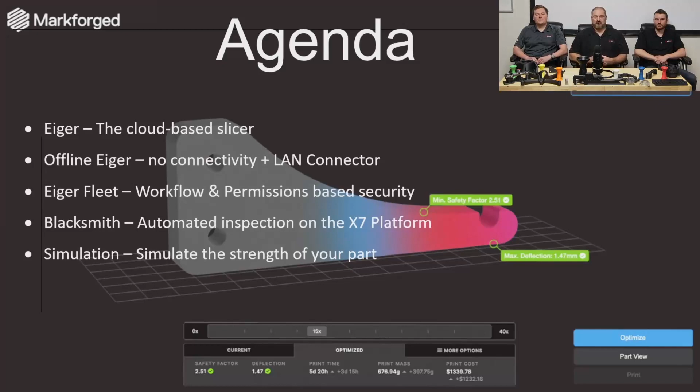Real quick, what we're going to cover today is the Markforged software lineup. The first thing we're going to talk about is Eiger, what we call Eiger Core. This is the cloud-based slicer, it comes free with every Markforged printer. We're going to talk about some benefits of that. Then we have a version of that which is offline Eiger, we'll discuss the pros and cons to that. And then Eiger Fleet, a pretty powerful suite of slicer software. Then Blacksmith, automated inspection on our industrial X7 platform. And finally, we'll wrap up with simulation. Joe recently did a webinar on simulation that goes very in depth, so reach out to us after you see what we have to say today if you wanted to see that webinar more in depth, we're happy to point you in the right direction.

So with that said, I'm gonna have Joe start out with Eiger here.

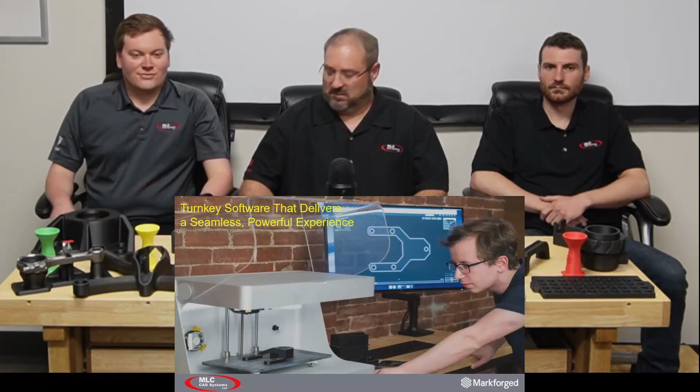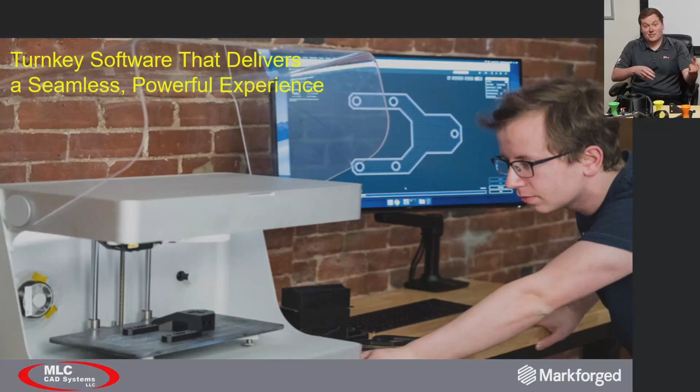Thanks, Kyle. So Eiger, basically at its core, it's a slicer. What it's doing is taking your STL file and slicing it into layers, so that it can be read by the printer. Really, Eiger is a turnkey, seamless experience to use. Like I mentioned, it's a slicer at its core.

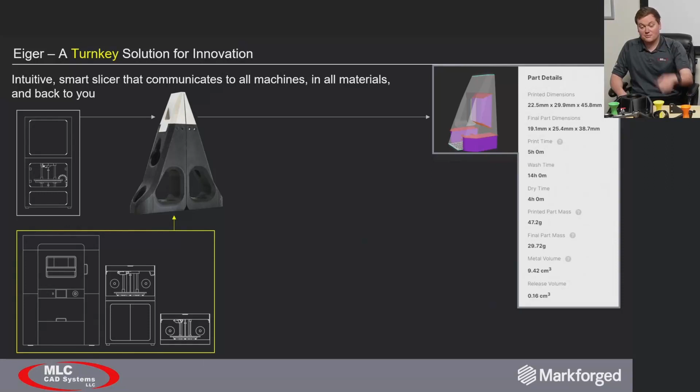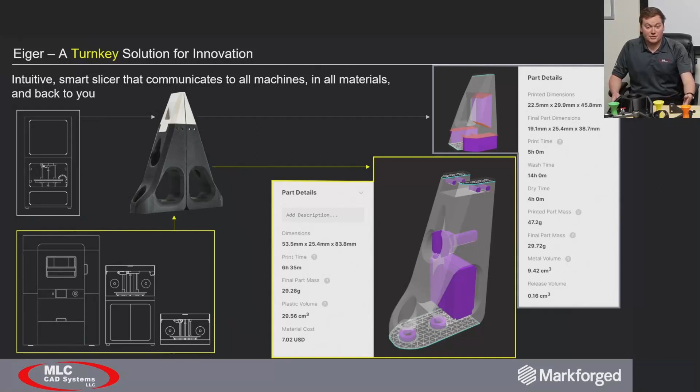What it's doing is communicating between all the different printers and all the different materials that Markforged has to offer. Here you can see this robot end effector, a hybrid part, so we've got some metal tips on it, and then we've got the onyx material, a composite material. So we're communicating between these different materials and the different printers, and it's feeding this information back to you. Here you can see the metal tip, it's telling you how long it's going to take to print, how long it's going to take to wash, how much material it's going to use, and what that cost is going to look like. A similar type pattern there with the composite material. So it's very automated, communicating all that stuff to Eiger and back to you.

So I mentioned about it being turnkey, the ease of use. Let's look at a comparison between Eiger and say a hobbyist slicer. One of the great hobbyist slicers out there is Prusa slicer. Now what I'd like to draw your attention to is the difference between all the different settings that you have on Prusa slicer versus Eiger. What I like to think about is think of it like a car. So car manufacturers give you access to the steering wheel, the throttle, the brake, to operate the vehicle. They give you all of the right things.

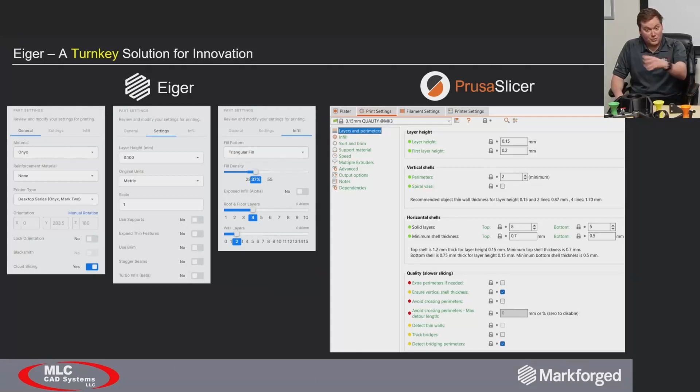They don't want to give you too much, because then you start screwing stuff up. It's a very similar idea with Eiger. Markforged is giving you the right settings, that's all you need. Eiger did the research for you. They figured out what settings are going to give you the best print time, optimized print time, optimized for strength, optimized for part quality. Because of that, it's easy to use, and it doesn't take anyone with a lot of experience. With Prusa slicer, you've got too many settings, tons of settings, and it takes a lot of experience to know what works.

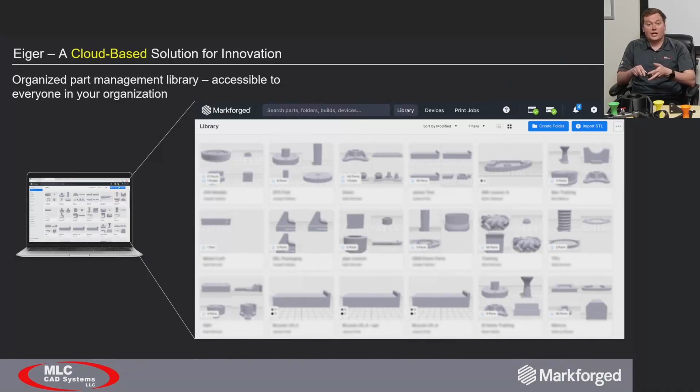Now, it is a slicer at its core, but it's also more than that. Eiger is a cloud-based solution. So what this looks like is all the people in your organization who have access to Eiger, they can load in their parts, they can organize their parts into folders, and you have access to all these parts and all these folders and all your printers in your organization. So I'm out of Atlanta, and I can send a print job to these guys here in Dallas, or I can send it to our customers, or rather our other offices out in like Tempe, Arizona, for instance.

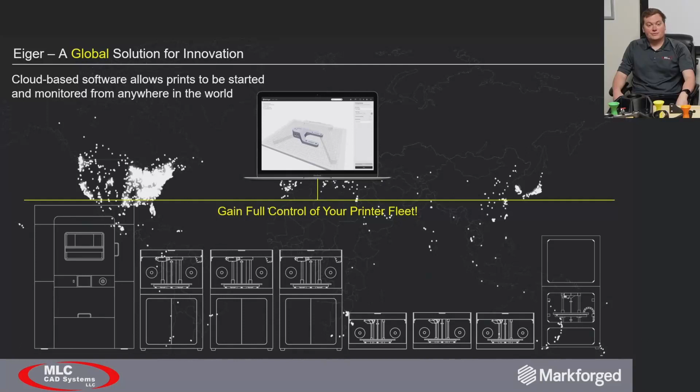And it's automated, right? It's an automated solution. And so what this looks like is take your printer maintenance.

All the printer maintenance is tracked in Eiger, and it's communicated to your printer. So you don't have to reach out to your reseller and say, hey, I've been printing X amount of hours on my printer, I've been running X amount of material through it. When do I change my nozzle? How do I know when these preventative maintenance items need to be tended to?

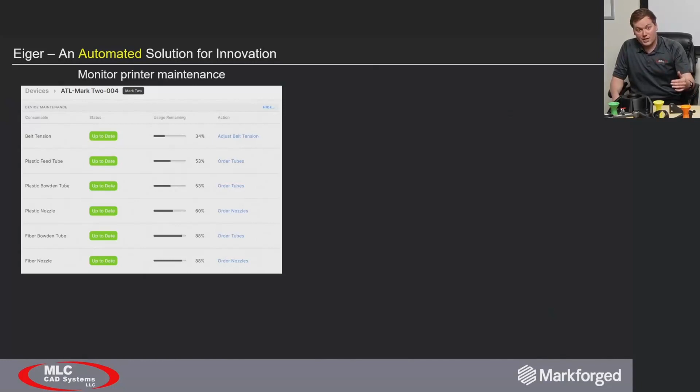Eiger is tracking all this information and it's fed back to you directly. There's no guesswork involved. Similar with updates, right?

When Markforged releases a firmware update or a software update for Eiger itself, that information is readily communicated to you. The software updates happen automatically. Usually when you log into Eiger, you already see, hey, we fixed some bugs there. And then the firmware updates just show up on that little blue bar on the bottom of your printer's user interface, and you just update accordingly.

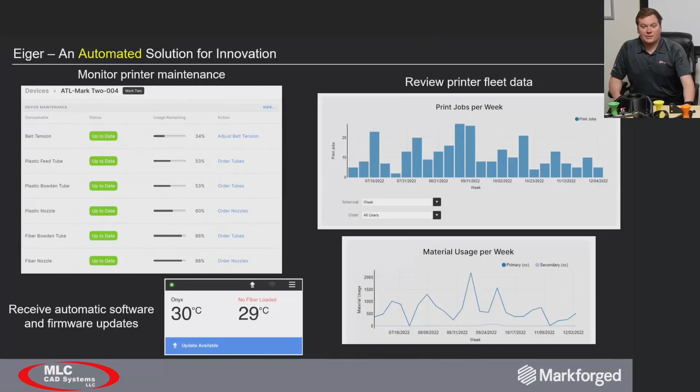And for those who need to see how much material is being run through the printer, who's running the most print jobs, what jobs, what parts specifically are being run the most, there's analytics available in Eiger that summarize all that information.

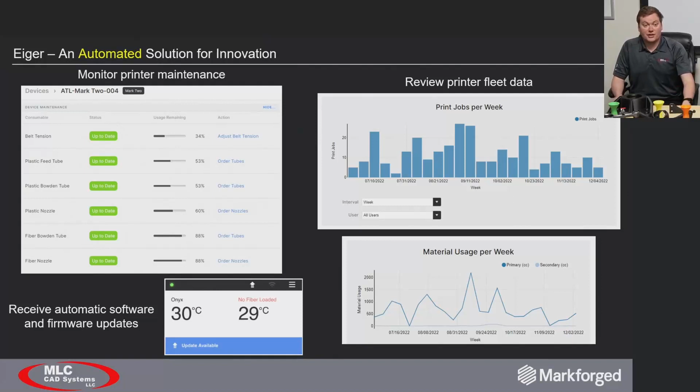Now we have some customers that sometimes hear cloud-based and get a little cold feet. Well, Eiger is the first cloud-based slicer to be ISO 27001 certified. So what that means is that all your part and user data are encrypted, both in transit and at rest. They use the Amazon Web Service Cloud, and ISO 27001.

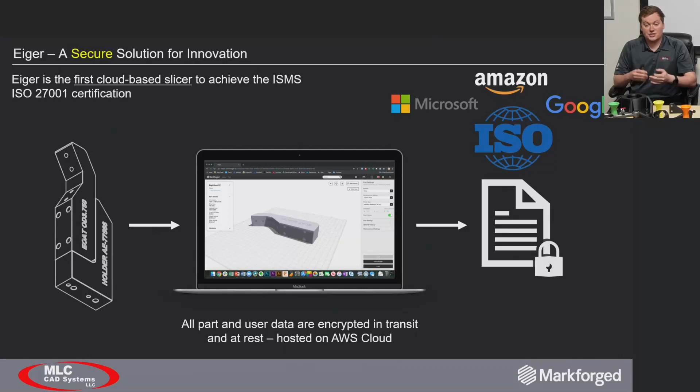Some people may not be familiar with that. That's an ISMS certification, and big Fortune 500 companies like Microsoft, Amazon, and Google have this certification. By doing so, you know that your credit card information and your communications that run through there are all safe and encrypted. Eiger is the same way.

Hey Joe, it looks like there's a couple questions.

The first question: is it the same slicer that we use for all of our machines? Yeah, as I had mentioned, Eiger communicates with all the different printers. So if you have a Metal X printer, you're going to use Eiger. If you have an FX20, or an industrial, or a desktop, all these different printers are going to use Eiger. And all the material profiles are already in there. So if Markforged were to release a new material, you wouldn't have to go in and program anything or put the material in yourself.

So you're telling me if I'm printing in composite or metal, it's the same interface either way? That's correct. Oh man, that's great. Yeah, very easy to use. So it looks like there's another question here.

So it's cloud-based. So what happens if we lose internet connection? What if I'm printing? What if I'm trying to slice? How does all that work?

Yeah, it's a great question. We get that sometimes, customers reaching out asking about that sort of stuff. Well, I can assure you that even though Eiger is cloud-based, when you go to send that job to the printer, that print job downloads straight to the printer. So while it's printing, even if you lose internet, you're not going to have a print failure or anything.

Oh man, that's awesome. Well, I think that brings us to our next subject that we want to talk about. So when we're talking about offline, Bryce, tell us a little bit about offline Eiger, why don't you?

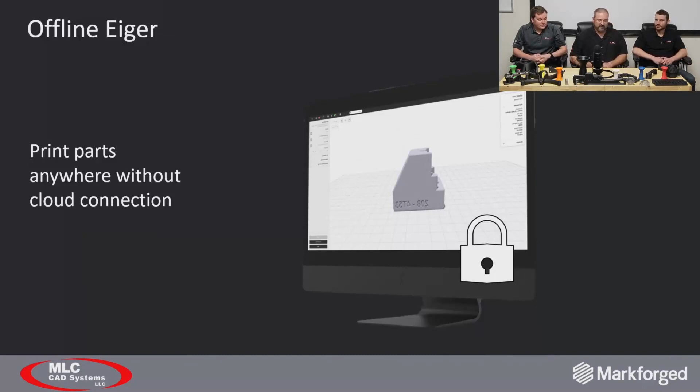Yeah, so let's get into it with offline. Offline is great for those customers that, for military for example, if you're going to be out in the field, you don't always have an internet connection available, and you may still need to print some parts. And so that's where offline Eiger comes in, or for specific companies that need that extra layer of security.

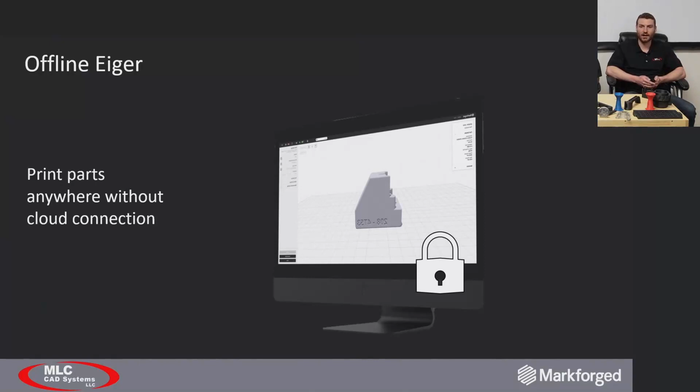So Eiger takes everything 100% offline. You have your printed parts, your files, and everything stored on your local computer or your local network, and it's all safe and secure there. Your parts are also, once they're sliced, locked to the specific serial number of your printer. So if you put that sliced file on a USB stick, you can only print that on your specific Markforged printer. So nobody else can take your files and run away with them and print them on their machine or anything crazy like that.

The other really nice thing you get with offline is you get quarterly firmware and software updates. So your slicer, Eiger, is always running the latest and greatest, and so is the printer. Sometimes you'll get updates that make it a little faster, improve the quality a bit more, so they're always keeping you up to date there.

The other awesome thing you get out of offline Eiger is a LAN connector. You can use this to jump into your local area network and get connected through everything, and you can still monitor your print status, receive telemetry, and send your prints to the queue and walk over and print them. So you can either send it through this LAN connection, or put it on a USB stick, take it over, and print it from the machine directly.

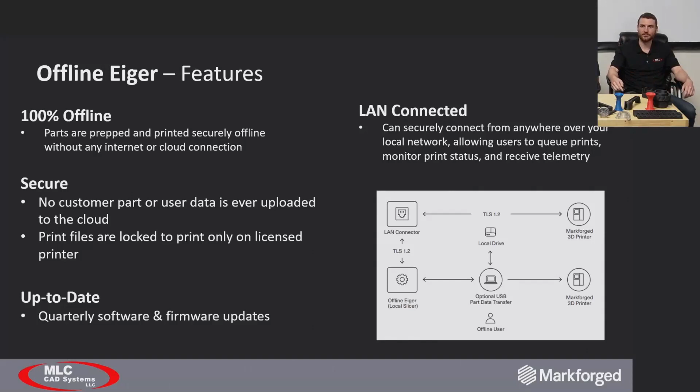Oh, that's great. So, question for you, Bryce. If you know you have offline Eiger, how many users can you have? Are there any limits to that based on the printer you have? Yeah, that's a great question. So with offline, when you get your device, you get unlimited downloads for that specific device, and as many people as they want can run through it.

And speaking of users, there's some really cool user control with Eiger that you can use in Eiger Fleet. Hey, that's me. It sure is. The Eiger Fleet is probably one of the more advanced slicers in our fleet, right?

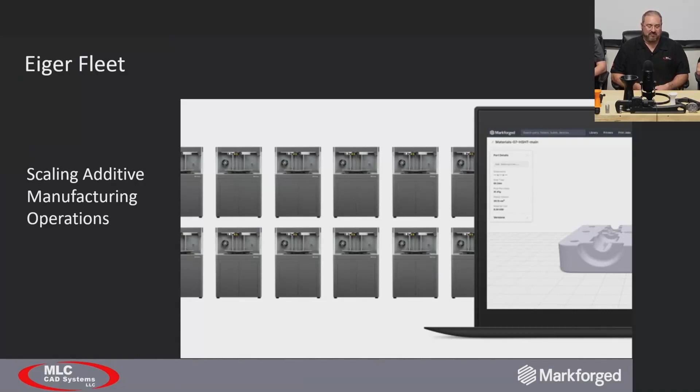What it does is it's scaling additive manufacturing operations in our user base. So let's talk about the features of Eiger Fleet.

Probably one of the neatest, because I've got a background in data management, is the ability to manage our teams. This is done through role-based access control. What does this all mean? It means I can create machine groups, I can create user groups, and then as I go through my processes, I can allow users to only have the ability to print on certain machine groups, on certain machines, and then users can have certain views to folders.

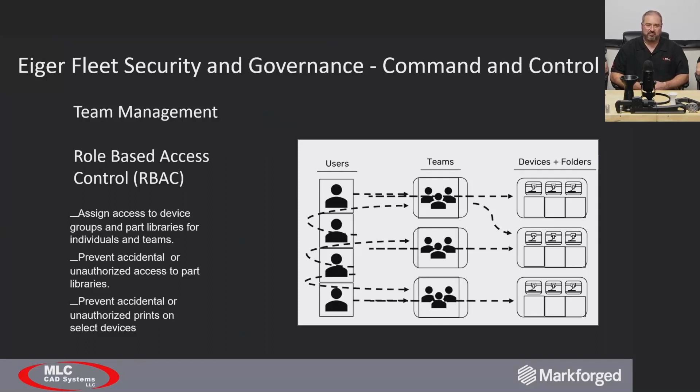So in other words, say for the marketing group, we could make it where they couldn't see any of our parts that aren't released. The idea would be that when you have parts that are kind of work in progress, you want to keep people who aren't pertinent to that project out of those parts and prevent them from being able to print those.

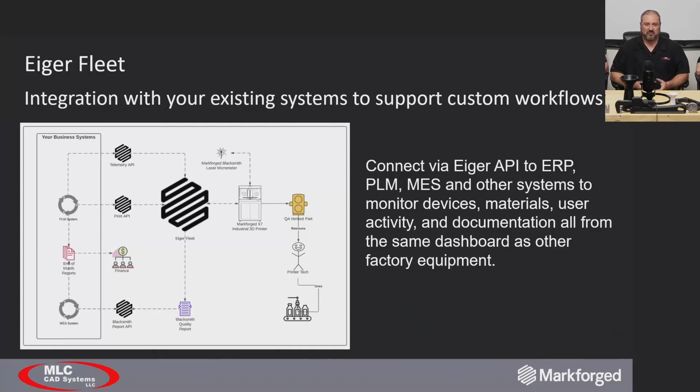So the next great feature of Eiger Fleet is the open API. This allows us to integrate with any of your existing systems within your business today. For example, we could come in and integrate to your ERP system, which would give the ability to say if a particular product was ordered, it would kick off a print job for the particular part involved in that assembly, right? So that machine would print the part, comes out to the printer tech, who then drops that into the assembly line, and or packages that, and you're good to go.

As far as features of Eiger Fleet, understand that Eiger Fleet works in conjunction with our cloud Eiger slicer. So our core Eiger slicer, this is an addition to our core. Just like on our core, even our offline, we're still using ISO 27001 certification, so you're still encrypted at rest, encryption at transfer.

Another great thing on the security side of Eiger Fleet is we have the ability to come in, and whether you're going to use single sign-on or whatever you use in your organization—if your IT group already has security protocols in place, we can loop that into Eiger, and use those same security protocols to gain access to Eiger.

Again, role-based access control. A perfect example of this is if we have younger users that come into the organization, people who aren't necessarily super well versed in additive—this would allow them to design a part, configure a part, and then push that through the workflow to our more experienced users in the organization, who can then analyze that and make sure that we're not printing a part that's destined to fail, or that they haven't overlooked something important to the project.

That's a great question. When we talk about the workflows, the example I used earlier was, if you bring somebody into the organization that doesn't necessarily have a lot of experience in additive, Fleet would allow them to set that project up and submit that for approval. So what we can do is put the more senior additive individuals of the organization in that approval process, which would allow the junior additive person to submit that for approval.

So while you're sitting at the desk and I don't know anything, I can submit that to you and you can review it, and then comment on that, and either we're going to print it or you're going to come back and say, hey, you need to turn that part, reorientate that part, I'd suggest a different material, something like that. So it allows us to really control that instead of printing something that isn't going to work for the organization.

So with that comes quality, right? We start talking about quality control. I think Bryce is going to tell us a little bit about Blacksmith and our built-in quality control checks.

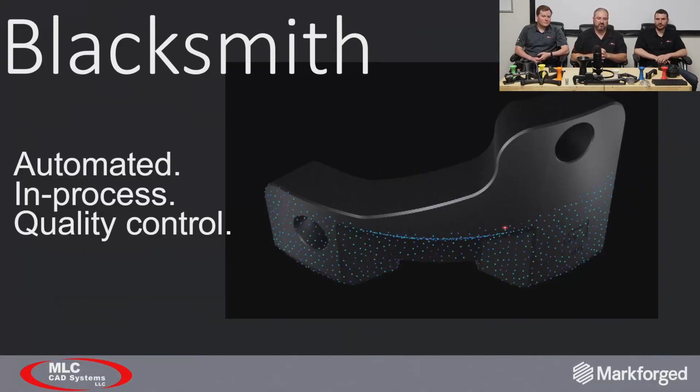Yeah, so let's get into it with Blacksmith. This is probably my favorite feature of Eiger that you can get, and it's really nice for in-process quality control. What this does is it takes advantage of the laser micrometer that's built into the X7 print head, and you get a couple of really nice features out of this.

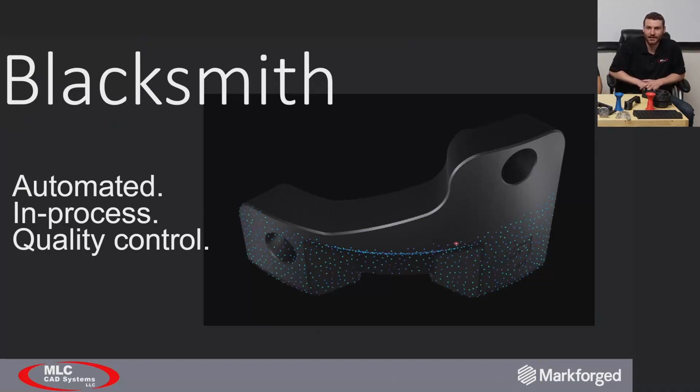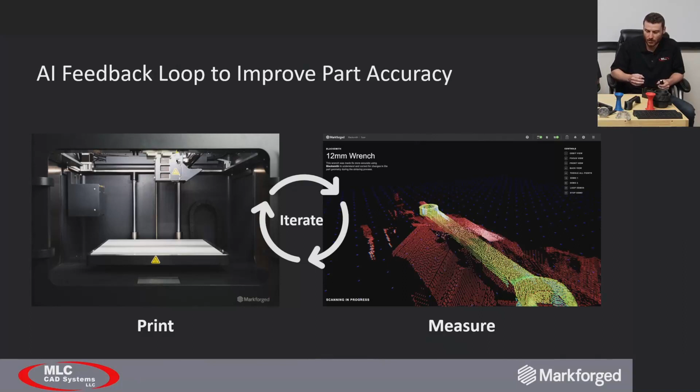The first one is this closed loop feedback, where you can have your printed part, and the micrometer is going to scan the part as it prints. It's going to take into account the different bead widths and the different ways the fiber and plastic were laid down, and compare that to your actual STL part file to find out where the differences are. So if there's a circle or hole that's smaller or bigger, it'll account for that, and the next time it prints that part, it's going to get even better.

The second part of Blacksmith that's really nice is this in-process quality control. You have a couple of traditional methods. The visual one that we all know and love - you pick something up and try to eyeball it and make sure it's about right. This isn't always the greatest. It can differ from person to person.

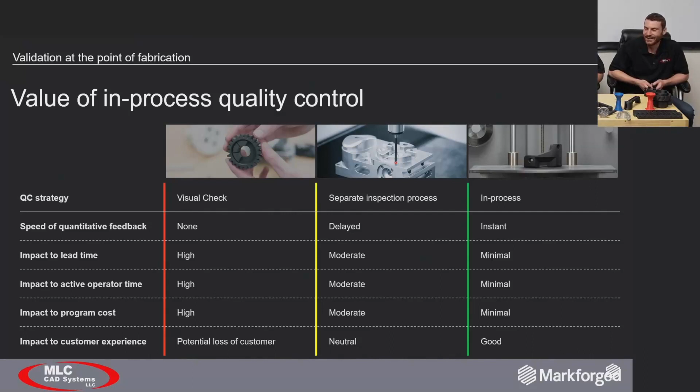Kyle's getting a little bit older, his eyes aren't quite the same as they used to be. Oh, that's for sure. And he may let a couple things slip past the line that aren't the right quality. Joe, on the other hand, is a little bit younger, his eyes are a little better, so he may still get some stuff by, but he can't spit out a whole report for QA. He's just going to write down, circle looks good.

So if you want something a little bit more technical than that, you can jump over and use a separate inspection process, like a laser scanner or some sort of CMM arm. You can use their software and hardware to measure the part really accurately.

But you need somebody with a lot of expertise in that type of software and hardware, and you also need the time to be able to do that. Who has time nowadays? So Blacksmith comes in and solves all those issues at the same time.

Blacksmith will scan your part as it's printing, and it's going to pick up where things are off and where it might not be quite exact, and it's going to spit out a whole report for quality control to look at that you can hand over as soon as the part comes off the print bed.

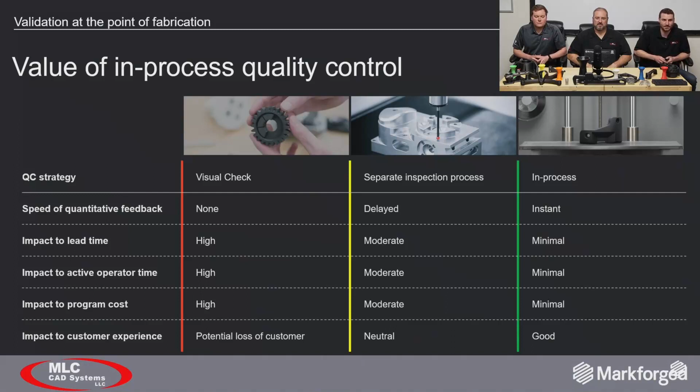So let's talk a little bit about how you set Blacksmith up on the printer, because I think it's a pretty cool process to see. The first step of this is you're going to get this really nice machined print bed here.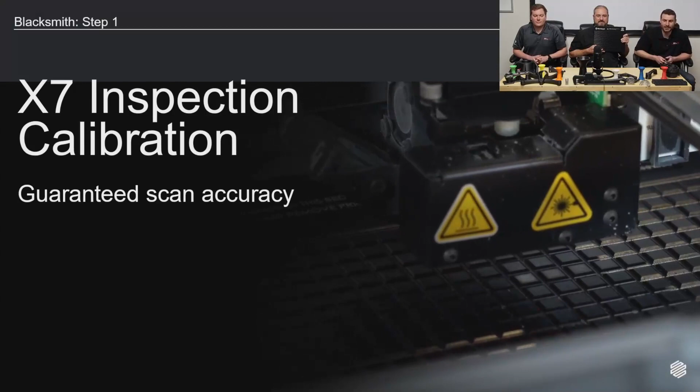This bed has known features and known dimensions for every little bit of it, and it's plugged into the serial number on the print bed. So you enter that into the printer, it pulls all the information from the cloud, and then it'll use the laser micrometer to scan this and adjust for any sort of laser or motion system misalignment issues, getting things as accurate as they can possibly be.

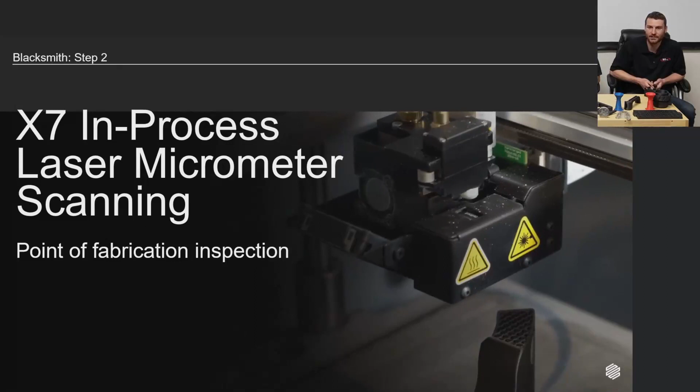So the next step is, of course, slicing your part and printing it. Here you can see the laser actually scanning the part while it's printing. You can change the fidelity of the report by increasing the laser scan frequency. It increases your print times a little bit, but you get a much better report and a much better idea of where that part lies in terms of accuracy.

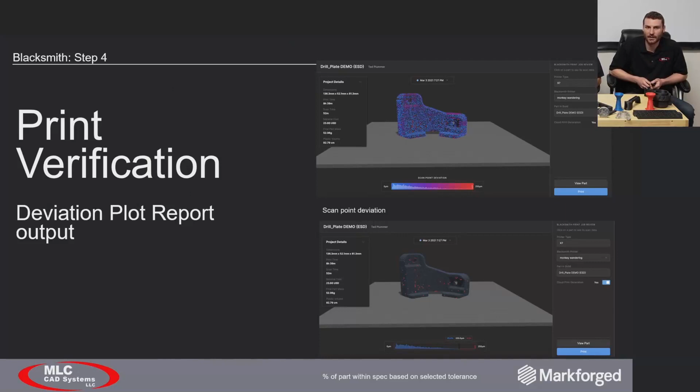So the fourth step is the software comparing your printed part to the actual file, and then it spits out a report for you. You can even have this deviation plot report where you can see little red dots, for instance, on the bottom part, where the part comes out of spec more than you'd prefer. It'll spit that out onto a piece of paper, or you can just have the visual model and know where that part lies. So that's Blacksmith.

That's really my favorite feature of Eiger. I think it's really great.

Bryce, it seems to me that maybe as you scan these parts, is your machine getting smarter? What's going on? How's it getting more accurate? Yeah, it's a great question.

So it's actually using machine learning. It's picking all the data up and using it, and every single time your printer's getting better and better.

So it seems to me that we're almost eliminating that quality step in the manufacturing process, speeding up that process. When we talk about quality, that makes me think about strength of our part, simulation of things. So I often get asked the question, how do I get this part as strong as you guys claim? Joe, can you tell us a little bit about simulation?

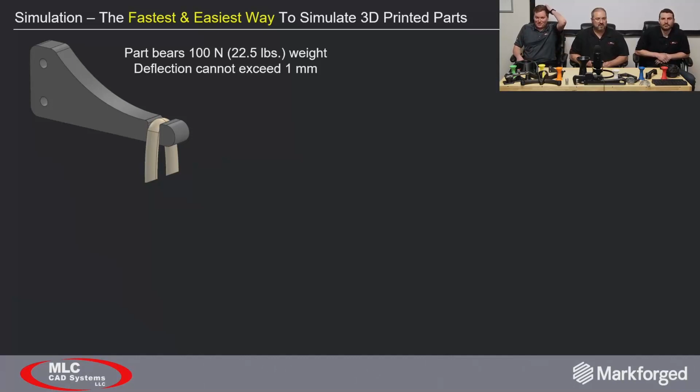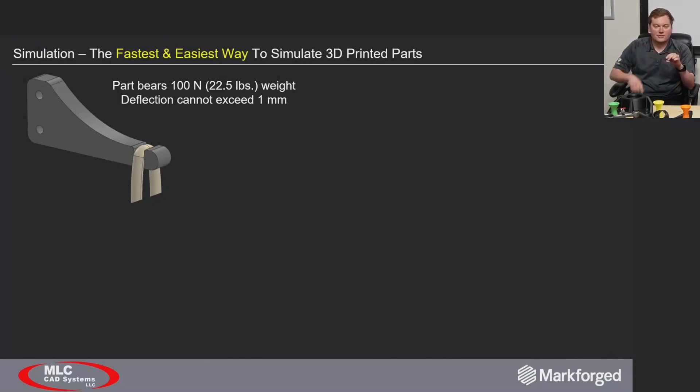Yeah, absolutely. With simulation, I think the easiest way to talk about this is to throw in an example. Let's look at this hook part. This part has to bear 100 Newton weight. So we got this part printed right here. At 100 Newton weight, that's about 22.5 pounds, and our deflection criteria is it cannot deflect more than 1 millimeter.

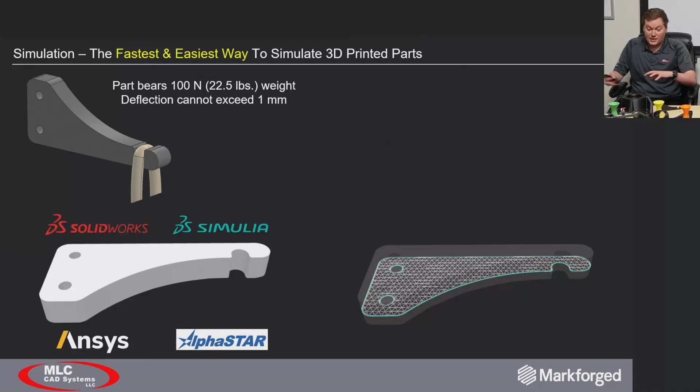Now, if we were to have this part injection molded or CNC machined, we'd have some potentially more general type software that could maybe handle that. But when we get into simulating a 3D printed part, now we've got to deal with this internal lattice, very complicated. We're dealing with anisotropic materials, we're dealing with composites since we're talking about Markforged. We've got this Onyx material, this nylon-based material, and now we're putting fiber groups in there.

And that's where Markforged simulation is coming in. To compare these two, if you look at metrics like solve time—the time to actually go through and solve this static simulation—if you look at the operator skill to run the software itself, the cost of these softwares... now these general softwares can do different things, they can look at static loads, they can do flow simulation, that sort of thing. But here we're looking at a niche application.

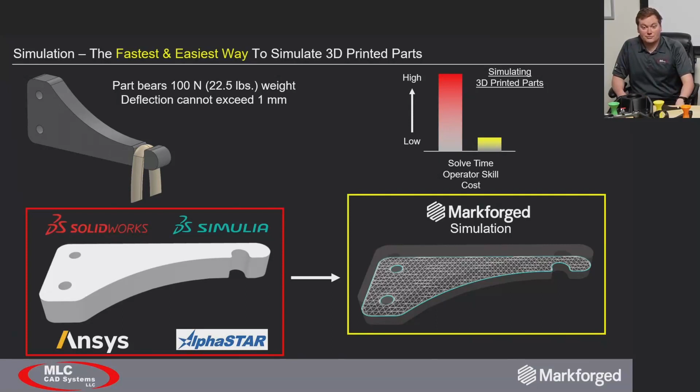Now with Markforged, everything because it's niche and because of how it's built into Eiger, it's turnkey, it's easy to use, and as a result it compares on a totally different level. Much easier and much lower cost.

Now when you go to load this part into simulation, you're charged with a variety of different things. You've got to select your anchor faces, you've got to select your load faces. When you select the load face, you have to select what the load is. Remember we said it was 100 newtons. And you need to talk about factor of safety as well as the deflection amount. We said it was 1 millimeter. We don't want to exceed that.

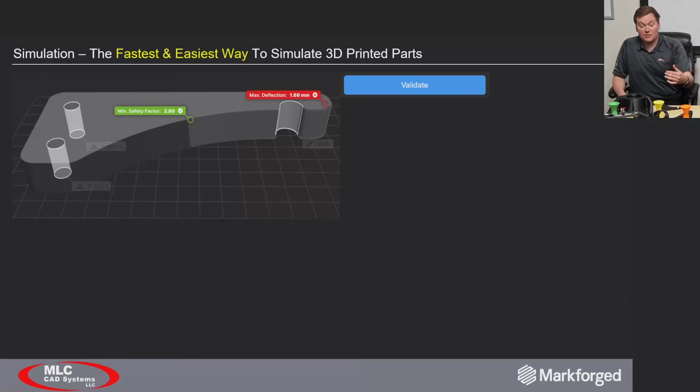And when we selected the validate based on just the original default settings, we see a deflection of 1.69 millimeters. Now one of the nice things is that simulation can then optimize, it can give you suggestions on how you can stiffen the part and reduce that deflection. So when we go to optimize, it takes a few minutes to run through, very quick.

And what it's going to do is it's going to optimize off of different variables. It's going to optimize based on time, based on cost, that's just with the onyx material, and then it's going to look at the composite groupings. It's going to look at an isotropic fiber fill, it's going to look at a concentric fiber fill. And what you'll notice from this table is only those two, the isotropic and concentric, we can see

a deflection that's less than 1 millimeter, very similar deflection values. But now if I draw your attention on the right side of that table, you'll notice that the print time is a little bit shorter with that concentric fiber. And you'll notice that the cost to actually manufacture that part is cheaper.

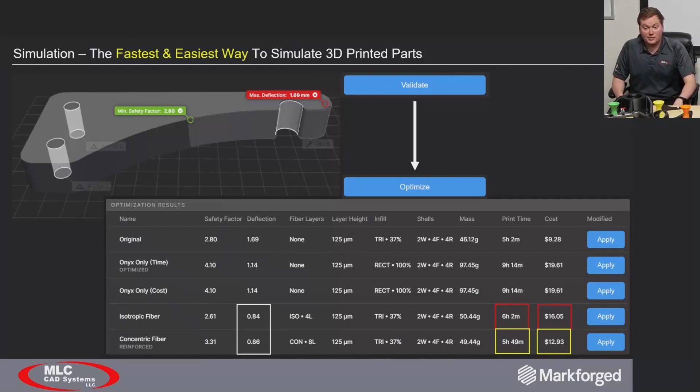So what we're gonna do is we're gonna optimize based on that concentric fiber, and we're gonna click apply, that's that button there on the right side. And now you can see this transition from our current, what we originally had set. We said, okay, we think this is good enough. Well, it wasn't. Simulation said you need to add those concentric fiber groups there on the top and bottom.

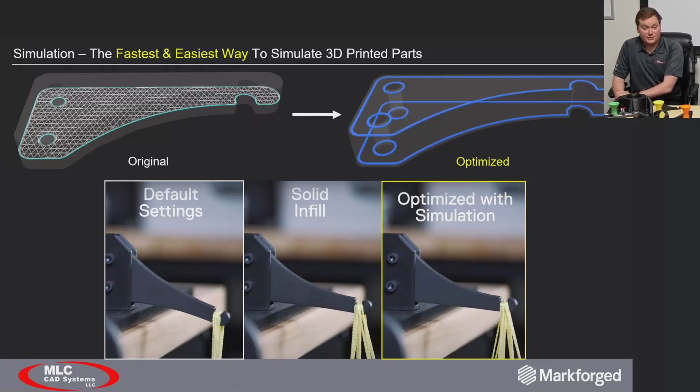And you can see the result. So with the default settings, you can see how much it's deflecting. It's deflecting a lot. Now when we optimized it with those concentric fiber fill, it's much stiffer as a result when loaded.

So what this is ultimately doing, to recap what simulation is doing, is it's cutting your print iteration time in half. Because before simulation, if you didn't want to opt for the general simulation softwares, what you had to do is just design and print and iterate accordingly until you were meeting your deflection requirements. So what it's doing is just narrowing that down and getting you to your end result faster.

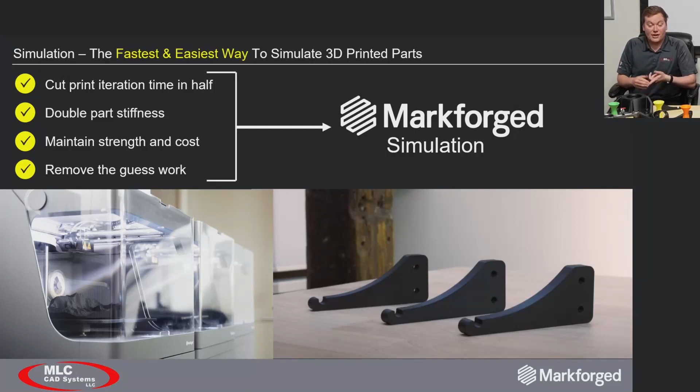And it's still going to suggest where to put those fiber fill types. So that's a question customers sometimes give us: where do we put fiber? How do I know when the part is strong enough? That's what simulation is helping to solve, and then ultimately removing the guesswork. And that's kind of been the theme of this whole webinar: Eiger is just a simple and powerful tool to use.

So Joe, it looks like we got a question: does this simulation replace my SolidWorks simulation? Yeah, that's a good question. With the SolidWorks simulation, that general simulation type software, it can do a lot of different things, whereas Markforged simulation is more geared towards your 3D printed parts. And I can tell you, trying to set up a 3D printed part on a SolidWorks simulation is going to give you some gray hair, man.

So it's not gonna replace their standard FEA analysis, is what I'm hearing. Yeah. Okay, gotcha. What we've done today is we covered the Eiger versions.